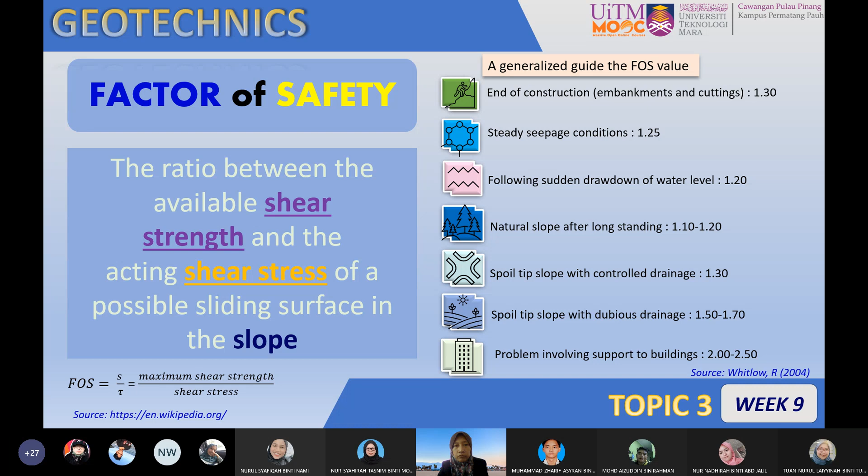Because of the additional loads that you apply on the foundation itself. If the foundation lies on the hilly sides, the value of FOS must be taken larger compared to other applications.

This gives us the formula: FOS equals maximum shear strength over shear stress, or by another definition, FOS is considered as restoring moment over disturbing moment. Later I will show you the differences between the restoring moment and the disturbing moment.

Now, this information tells you that when dealing with short-term stability, you have to choose the right strength parameters in your analysis. For example, when we analyze shear strength for undrained conditions, this can be considered short-term stability, and the parameters of the soil at this stage use the undrained C.

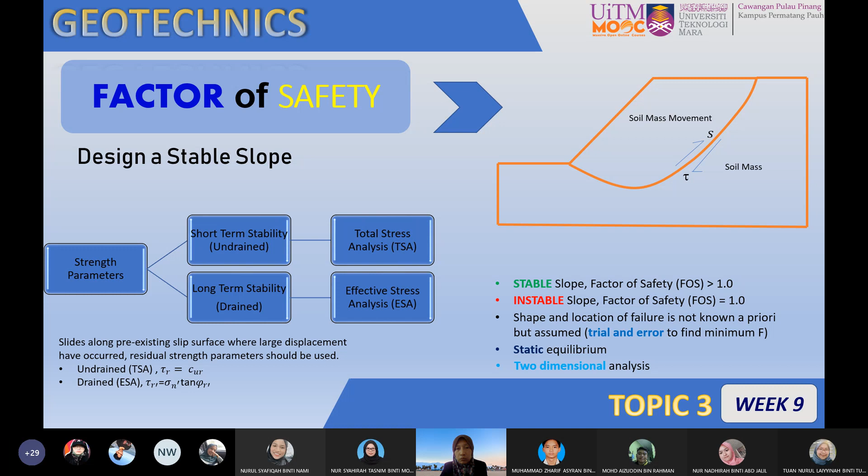As I said, for complex problems involving different soil parameters, pore water pressure effects, the water table, and additional loading applied to the slope, we couldn't analyze it using the limit equilibrium method at that time. Somehow it can be done, but it requires advanced computer technology to analyze the problem.

So these are the examples of the failure for slope. We have the planar failures, we have the circular failures, we have wedge failures, and the last one is the complex failures. For planar failures, it can be categorized into two: infinite slopes and also the finite slopes. So for infinite slopes, we have small depth, long failure surface. Meanwhile, for finite slope, we have a simple wedge. This one just refreshes what we have learned in the previous class.

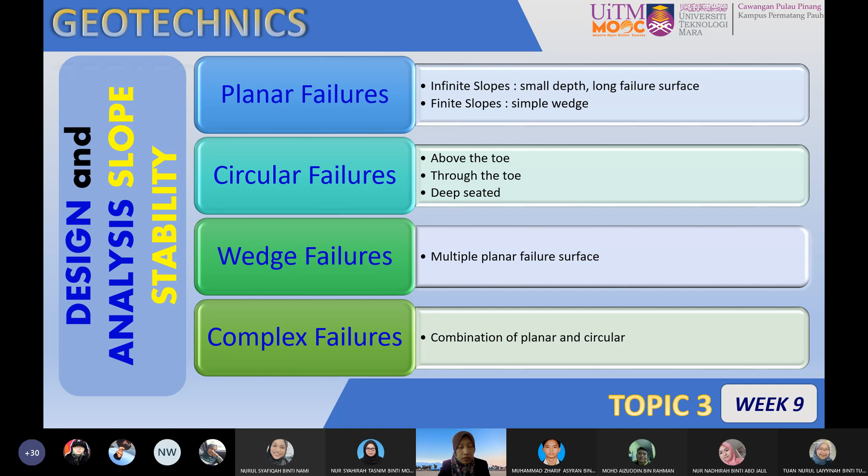Same goes to the circular failures. We have 3 types of circular failures. We have base failure, we have toe failure, we have also face failures. And the next one is the wedge failures. This involves multiple planar failure surfaces. And the next one is the complex failures, a combination of planar and circular.

And we go next to the type of stability analysis. For this time, we can see that the slope stability analysis can be done using 2 different procedures or 2 different methods. First, we can adopt the mass procedure method, and then the second one we can adopt the method of slices. What are the differences between these 2 methods or procedures?

The mass procedure is when the mass of the soil above the surface of sliding is taken as a unit. This procedure is useful when the soil that forms the slope is assumed to be homogeneous, although this is not the case in most natural slopes.

In comparison, in the method of slices, the soil above the surface of sliding is divided into a number of vertical parallel slices. So the stability of each slice is calculated separately. This is a versatile technique in which non-homogeneity of the soil and pore water pressure can be taken into consideration. It also accounts for the variations of the normal stress along the potential failure surface.

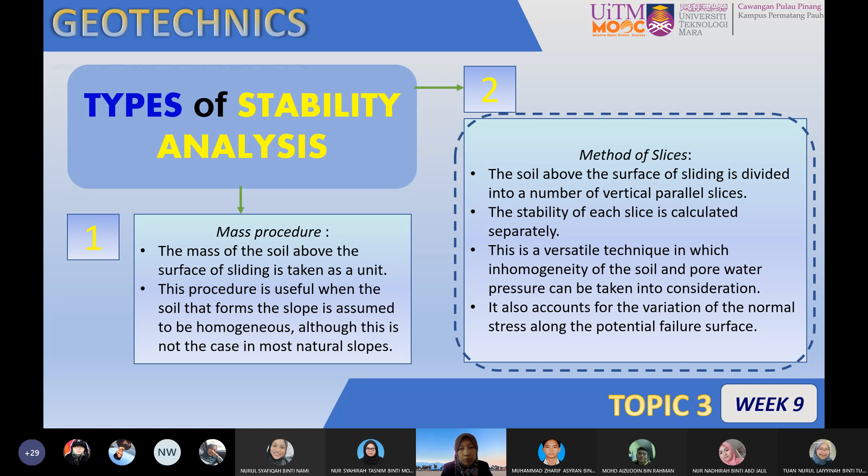So for your level, in this class, we only concentrate on the method of slices. Actually, you can analyze a slope using the mass procedure, but it depends on the situation. If you have a simple homogeneous soil profile, the best one is the mass procedure because we don't need to divide into vertical slices. Meanwhile, if you have a heterogeneous soil profile involving a lot of soil parameters, the method of slices is the best option to be taken in your analysis.

Okay, next we move to the stability analysis using total stress analysis by method of slices. These are the features categorized under total stress analysis. It is also known as short-term stability, that is end of construction, during and immediately after a newly cut or constructed slope in a fully saturated clay, with little drainage to occur. Undrained shear strength parameters need to be used, where Phi-u is 0 for fully saturated clay, and you have the undrained c and also the undrained Phi.

So how do we know whether to use TSA or ESA? Look at the problem statement. If the problem statement says that you have to find the FOS immediately after the embankment is constructed, that means you need to use the undrained strength parameters. If the problem statement says calculate or check the stability of the embankment slope 10 years after construction has been done, it means that it is a long-term stability analysis problem.

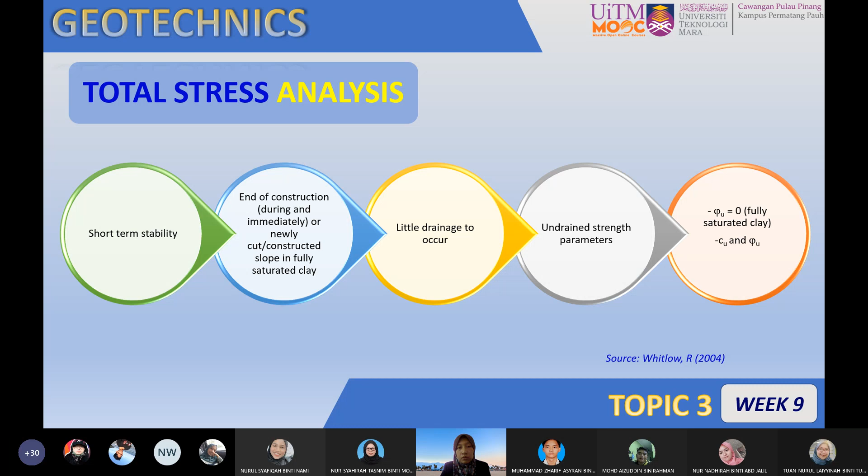So the next thing is the conditions where we can adopt all those analyses, such as homogeneous slope, heterogeneous slope, tension crack, and the next one is the submerged slope. So what is a homogeneous slope? Simply put, it is when the physical properties of the soil are similar. Let's say we have a single layer of soil, so we can consider it a homogeneous slope.

If you have multiple layers of soil on the slope, say soil type A and soil type B, then the slope is categorized as heterogeneous.

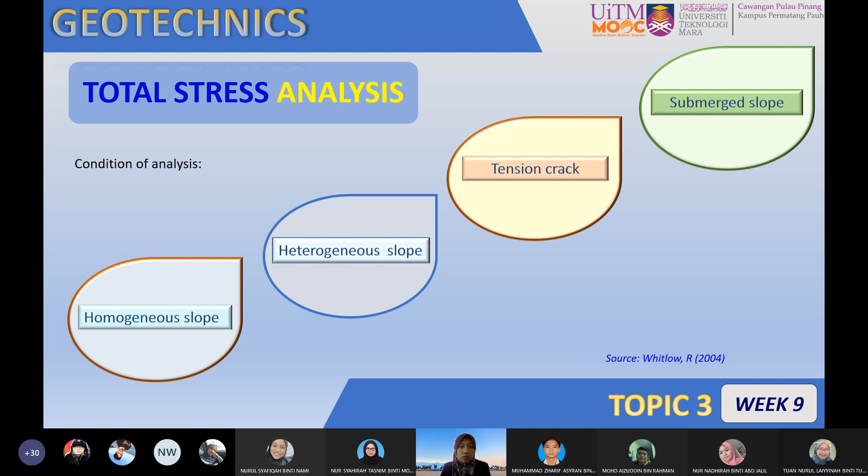Somehow, when you have a slope made of material from fully saturated clay, the slope is prone to have tension cracks, and it also has to be considered when you get the submerged slope problem. So the analysis will be different according to these four conditions.

Okay, look at this total stress analysis. The total stress analysis is actually applied to the case of a newly cut or newly constructed slope in a fully saturated clay, and the undrained shear strength, the shear stress, is equal to undrained Cu. It is assumed that the failure surface will take the cross-sectional form of a circular arc, usually referred to as the slip circle. The center of the critical slip circle will be somewhere above the top of the slope.

So the critical failure slip circle is one of an infinite number of potential circles. That means you have to do a few trial and errors to find the most critical one. If you look at the left figure here, you can see there are many potential slip circles created at this slope, because we are searching for the most critical, the minimum FOS.

So in slope stability, what we are actually doing is that we need to design for the most critical one. If the most critical one is safe, then whatever slope geometry comes to you will also be considered safe, stable. So at this moment, you have to find where the center of the slip circle is that produces the minimum FOS.

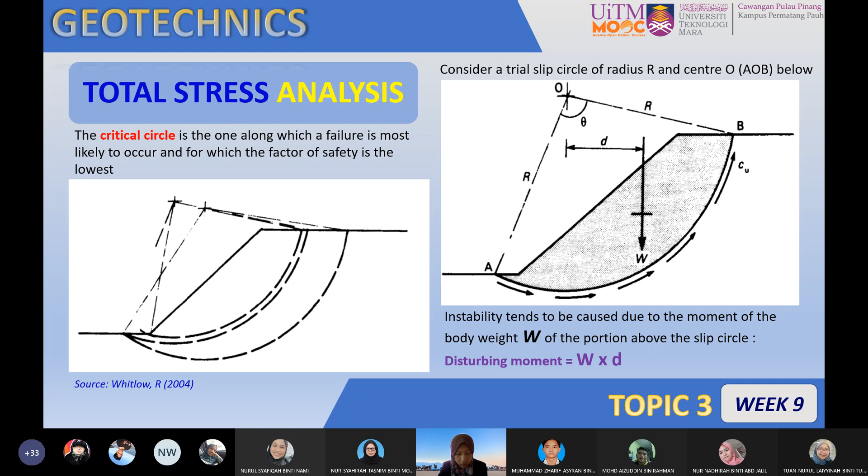So the length from A to B is equal to r theta. So the shear resistance force along AB is Cu r theta. Therefore, the shear resistance moment is equal to Cu r squared theta. So the shear resistance moment is Cu r squared theta, and the disturbing moment is Wd. Therefore, the FOS is calculated as you see here, Cu r squared theta over Wd.

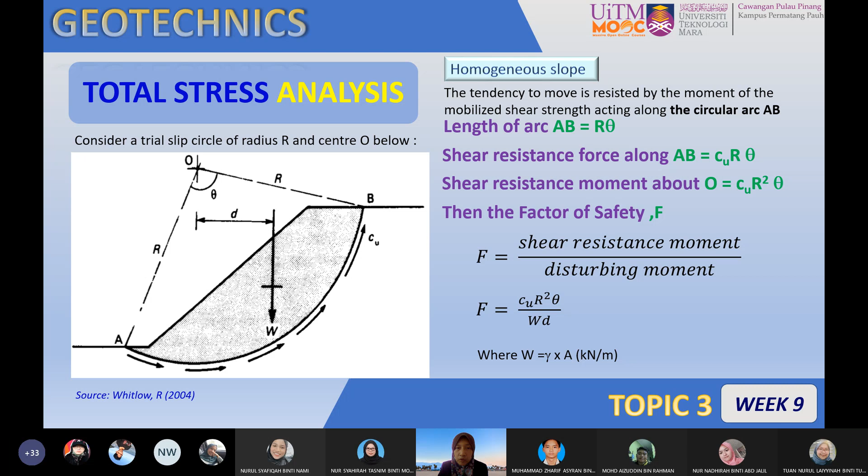So Wd is the disturbing moment. Meanwhile, this part here is the shear resistance moment. So what is W? W is the weight of soil above the slip circle. So it is the area times the unit weight of the soil.

So by this explanation, I hope that you can imagine how one slope, or one weight of soil, tends to move in this direction. At the same time, the other forces, what we call the restoring force from Cu and r theta, try to resist the moment coming from the weight of soil.

And the next one shows the conditions where we try to analyze total stress analysis for different conditions, such as an embankment or tip, figure A, then a cutting in a stratified deposit, B, and the next one is the effect of an underlying hard layer. What it shows is the extended formula when we consider all the cases here, and in situations A, B, C, and D, the created slip circle will be different according to the conditions.

For example, for A, the effect of an underlying hard layer. What happens to the shape of the slip circle when we have an underlying hard layer? So for figure A, when we have the hard layer at the bottom and the upper layer is soft, it gives us two kinds of failure.

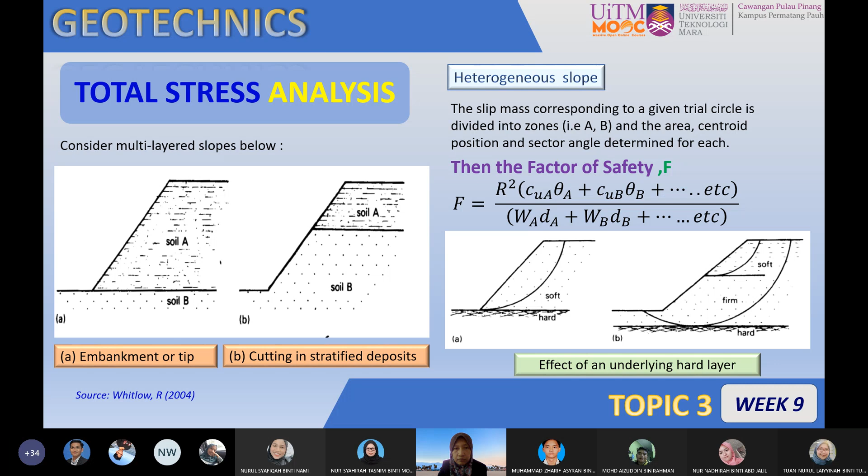And the next one, if we have a tension crack effect. So what about the calculation of the FOS? Of course, when we have the tension crack effect, the arc length above here will be taken as 0 because there is no shear strength at this portion. So the resistant shear force coming from the mobilized shear strength is reduced, because the theta, the slip circle angle, is also reduced.

And it is stated that in cohesive soil, the tension crack tends to form near the top of the slope as the conditions of limiting equilibrium. So no shear strength can be developed in the tension crack, but it can be filled with water. Allowance must be made for the hydrostatic force Pw, which acts horizontally, adding to the disturbing moment. So this time you can see that Pw·Yc is another component in this formula in the disturbing moment.

So the FOS is equal to Cu R square θ over (Wd plus the hydrostatic force times the perpendicular distance Yc). The Yc is taken from 2/3 of Z0 plus the height from the top of the slope to O. That's how we calculate Yc.

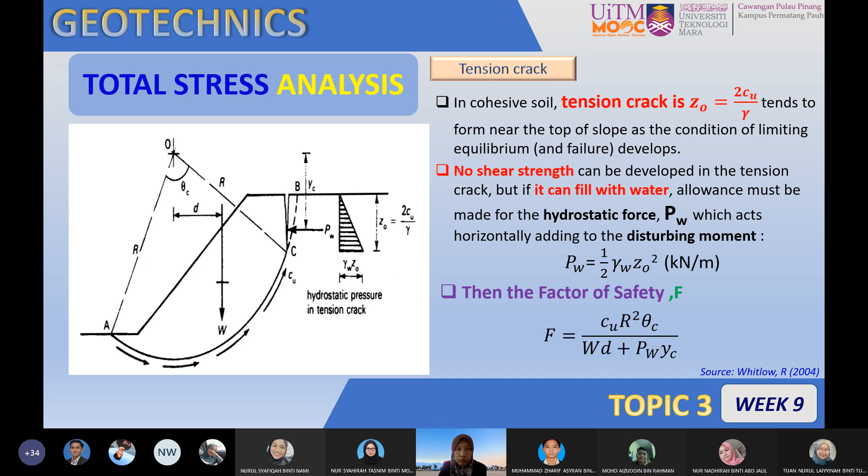And you can see that here, with the effect of the tension crack, theta is reduced to theta C, and the length of the arc above here at the tension crack depth is taken as 0. That's why you can expect that the value of FOS is supposedly getting lower. If you have this one bigger, the FOS is supposedly lower.

And then the next case, when we have a submerged slope. For the submerged slope, if you look at this figure, the equilibrium of the moment of the force is considered as 0. The left side is equal to the right side. The left and right sides' equilibrium conditions of the moment are taken in this case for a submerged slope.

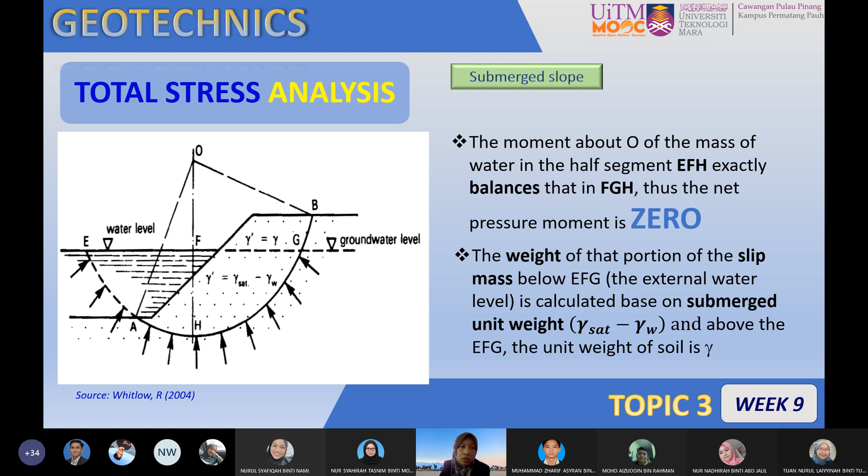So you can see from here that the moment about O of the mass of water in the half segment EFH on the left side is equal to the moment on the right side FGH. Thus the net pressure moment is considered as 0. For the weight of the soil mass above the water level, the unit weight of the soil will be taken as the bulk unit weight. Meanwhile, for soil below the water level, we have to consider the submerged unit weight, gamma soil minus gamma water.

This is one example of a case where you have a homogeneous slope and also the effect of a tension crack. We need to calculate the FOS first without the effect of the tension crack, then calculate the FOS with the tension crack empty of water, and next calculate the FOS with the tension crack full of water.

So as you see from this example, W is taken as one single unit. Looking at these solutions, we know that the mass procedure is used to get the FOS value. Because of what? You can see that the W above the slip circle is not divided into parallel vertical slices. Thus W is considered as one single unit mass. So this example uses the mass procedure to analyze the FOS.

Okay, first of all, when you have this kind of problem, we need to find the radius. Why is the radius important? Because you saw just now in the formula we have Cu R square θ over Wd. So R, the radius of the slip circle, can be found from the Pythagoras theorem, and then the sector angle, where the sector angle is measured. So you can see from here there are two sector angles.

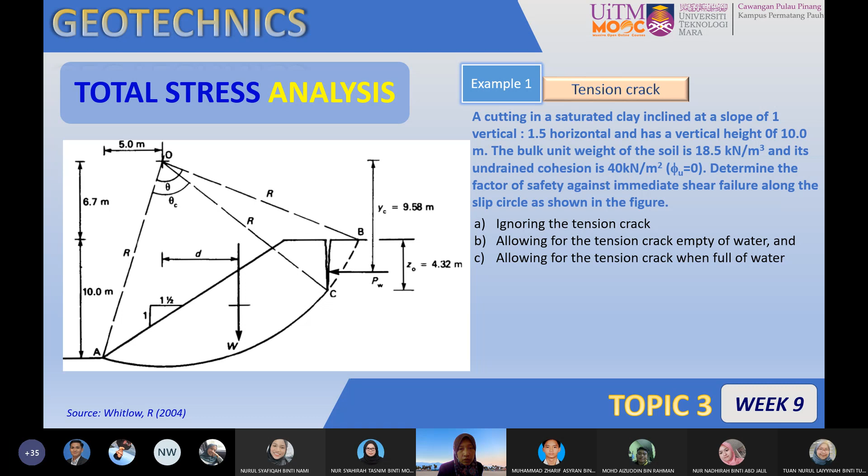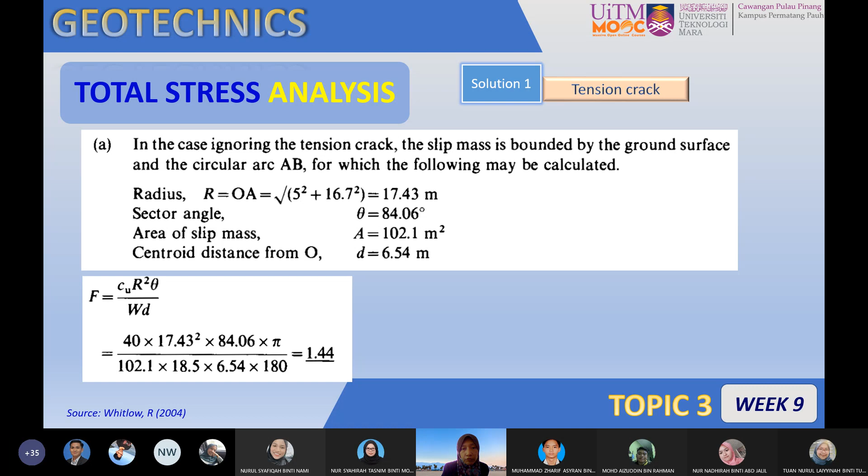It's very important to check closely the parameters involved, the right value to be considered in the calculations. And when you have all those parameters, you substitute into this formula. So first of all, we have the FOS is 1.44. Automatically, we can say that the slope is stable by checking the FOS is 1.44. The FOS is unitless. Please make sure when you write down the answer, there's no unit next to the figure number.

And the next one, you need to calculate the effect of tension crack empty of water. So as I explained just now, the sector angle reduced to 67.44, and same goes to the area of the soil mass, which is reduced, and the centroid distance from O is also reduced. Thus, the calculated FOS, as you see here, is around 1.84.

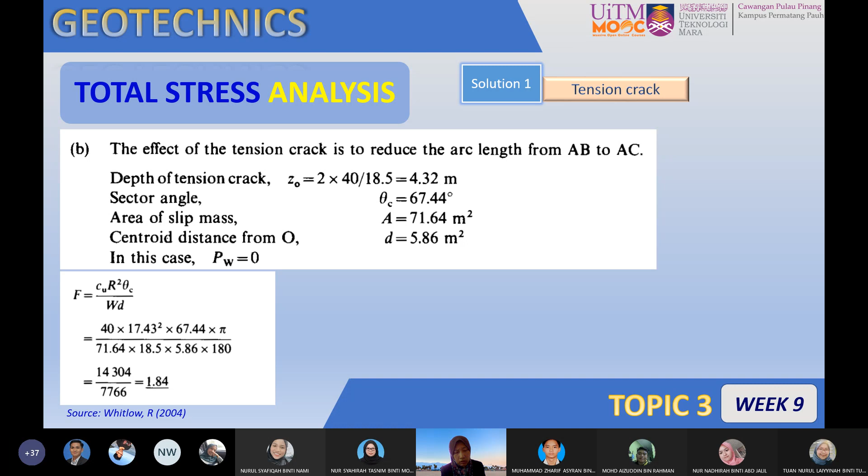And the next case is where we have a tension crack full of water. At this time, you need to calculate the hydrostatic force PW. The PW is taken from the formula: a half times gamma water times Z naught to the power of 2. So the calculated hydrostatic thrust is equal to 91.54. Then you need to find out what is the YC, and we get YC is 9.58.

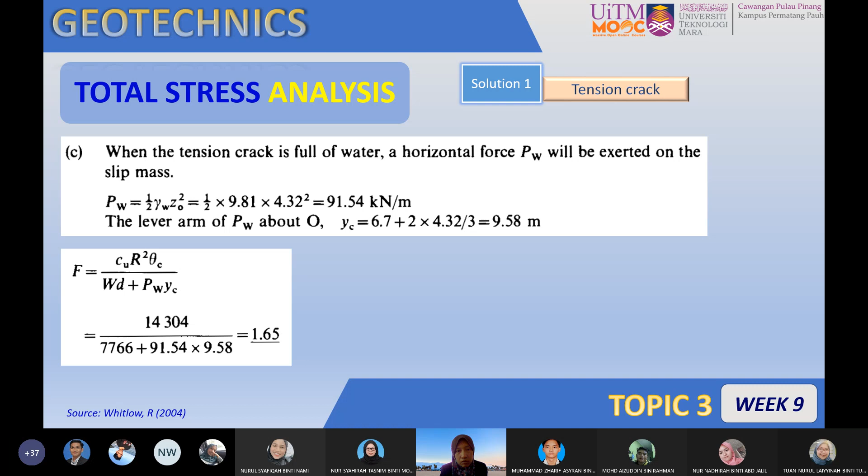Substitute into this formula, you can see that the FOS is 1.65. So the FOS from the second case to the third case shows a lesser value. From 1.8 something just now, it reduced to 1.65, because right now we have the hydrostatic force added as a disturbing moment.

How about if you need to analyze the problem using the method of slices? Same goes to the process. As you can see here, the single weight W of the mass is now divided into vertical slices. Just now we only had a single W1. But when we divide all the soil mass above the slip circle into a few vertical slices, the single W becomes W1, W2, W3, W4, W5 and W6.

It is recommended that you divide the W into equal widths. For example, from here to here is 2 meters, and then the width for the next vertical slice is the same, 2 meters. Same goes to the final one here. The formula is still the same. The only difference is that you need to tabulate a table to find the final answer for the shear resistance moment and also the disturbing moment.

Right now D is not considered as a single D. D needs to be taken differently for each vertical slice. For example, if you have W for slice number 1, the centroid for W1 is acting at 1/3 from the base. So you have to measure W of slice 1 to O. So what is the distance? And then same goes to W2.

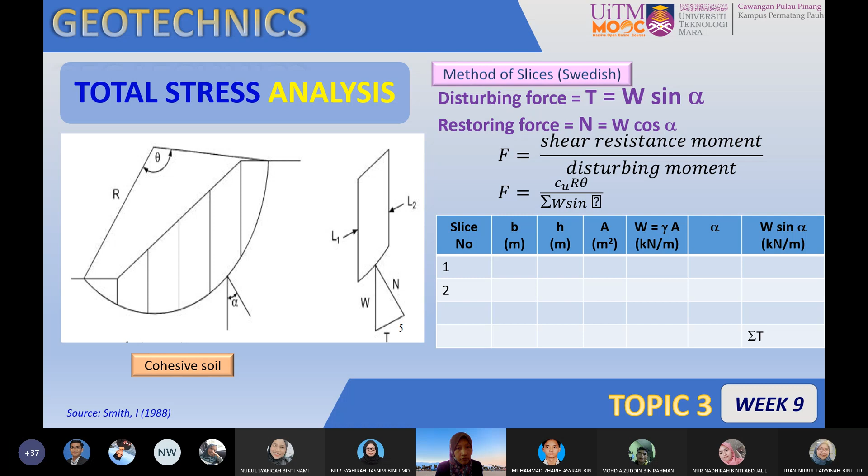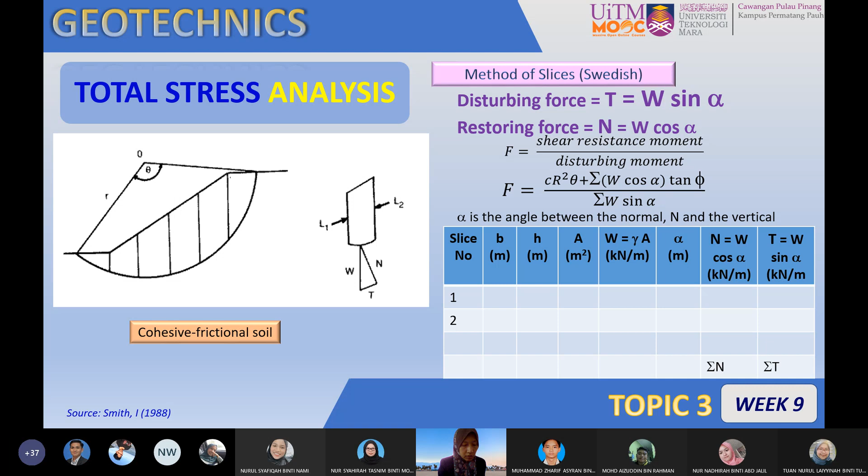So when we resolve into T and N, this is the formula we have. N is W cos alpha, meanwhile T is W sin alpha. So substitute this formula into these equations. Now we have the shear resisting moment over the disturbing moment becoming cu r theta over W sin alpha. So this is when you adopt the Swedish method, for example, for cohesive soil. Okay, same goes here for cohesive frictional soil. So again, tabulate the table, get the summation of T and the summation of N.

Okay, now we extend the analysis to the long-term problem analysis using the method of slices. These features tell you the situation when we can apply the effective stress analysis. First of all, effective stress analysis is also considered as long-term stability. This is used for existing slopes and embankments, spoil and waste tips, earth dams with steady or intermittent seepage, where we allow drainage to occur, and you can measure the effect of pore water pressure.

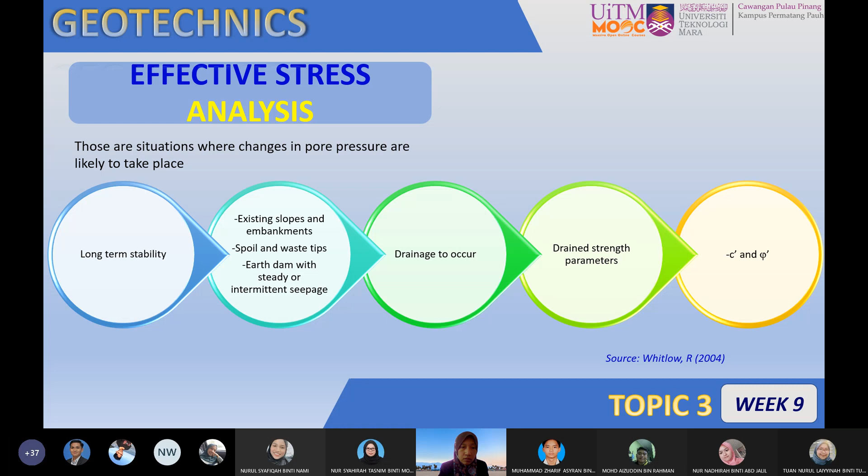At this time, we use the drained strength parameters, and you can see that the effective c and the effective phi are taken in the calculations. So it's actually vice versa to the total stress analysis. In effective stress analysis, there are two theories involved behind the calculations. The first is Fellenius, and the next one is Bishop. So what are the differences between these two theories?

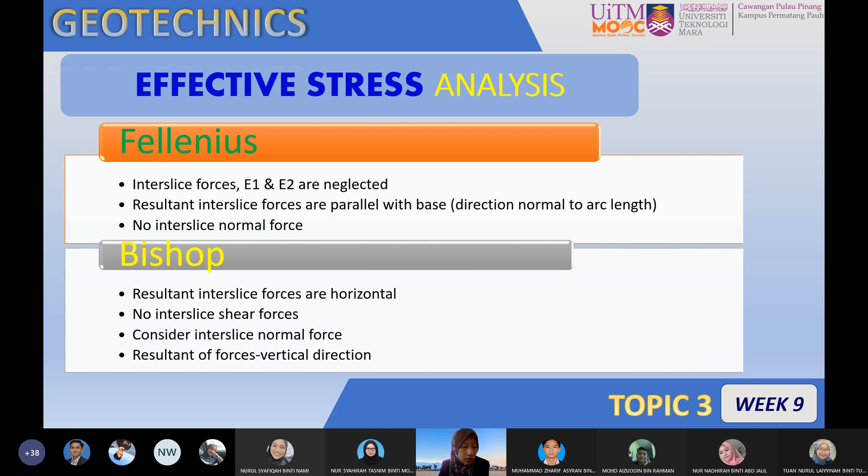For example, Fellenius assumes that the interslice forces E1 and E2 are neglected, the resultant interslice forces are parallel with the base direction normal to the arc length, and there is no interslice normal force. For Bishop, the resultant interslice forces are horizontal, and there are no interslice shear forces. It considers the interslice normal force, the resultant of forces in the vertical direction. So there is more complexity in the Bishop theory, as you will see after this.

Okay, this is the derivation of Fellenius using the method of slices. When we take Fellenius into consideration, now you can see the effect of the pore water pressure U. So above here, you can see that the pore water pressure is 0. For example, UL is equal to 0. So what is L?

L is a B sec alpha, which is the missing point here. The deriving of this formula is taken from here. You take one interslice, one intervertical slice from this soil weight W.

So you can see that all those interslice force components are derived from here. We have the internal vertical interslice force X1 and also X2. X1 is in equilibrium, however the direction is opposite between X1 and X2. Same for E1 and E2. But in this case, for Fellenius, E1 and E2 are considered zero because the method ignores their effect.

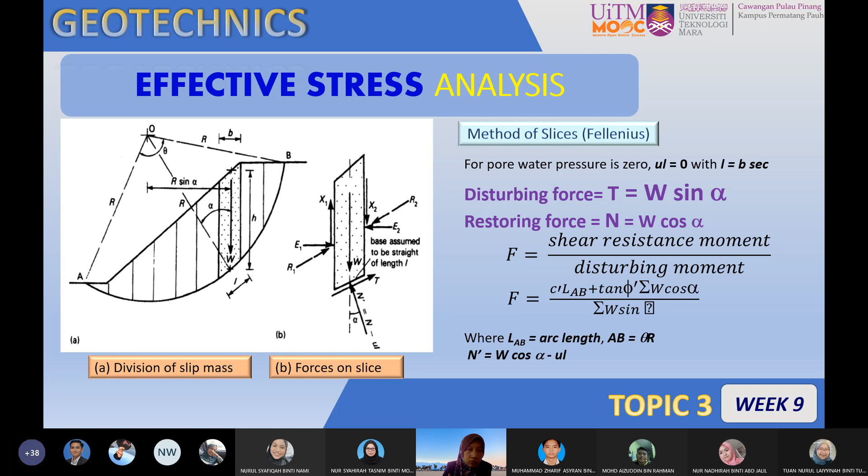Okay, the next one: we see that without tension crack effect, somehow we have to consider the analysis if we have a tension crack effect. This mostly occurs in cohesive material soils. At this part, the considerations for calculating z nought for effective stress analysis are totally different.

Right now you can see that the z nought formula takes the active lateral earth pressure Ka in the equation. Ka is 1 minus sin phi over 1 plus sin phi. You substitute this into the z nought formula so you can get the tension crack. The formulas are still the same.

We have the disturbing force, and we also have the restoring force. You convert all these things by taking the moment at O. This forms the shear resistance moment over the disturbing moment, giving the formula: C effective times L AB, plus tangent effective phi, times summation W cos alpha, over summation W sin alpha.

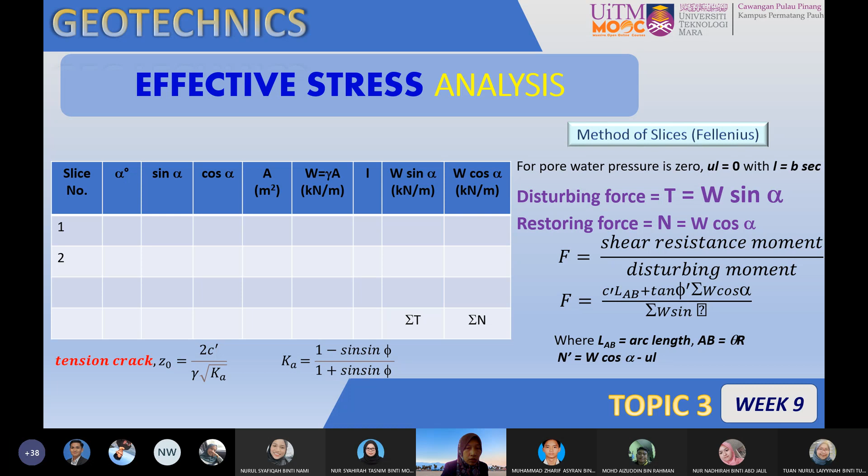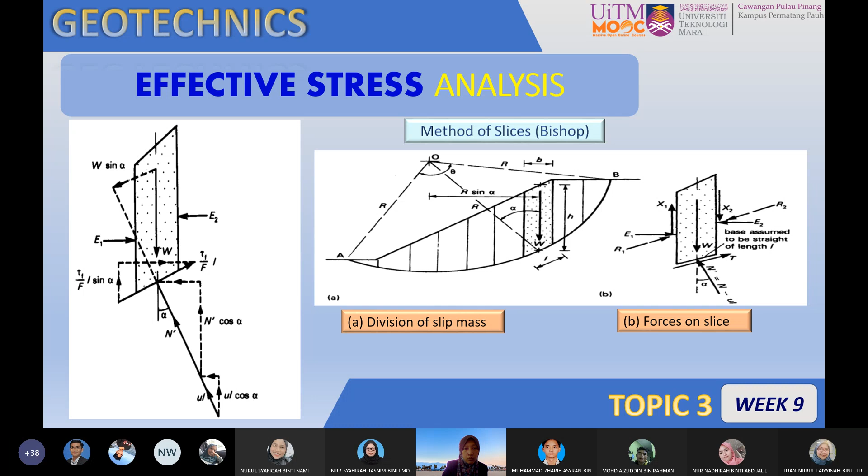Okay, the FOS using the method of slices for Bishop's theory. It is assumed that the forces acting on the sides of any slice have zero resultant in the vertical direction - so now zero resultant in vertical direction. For equilibrium along the base of the slice, these are the components involved, assuming it equals zero.

So we have W sin alpha minus shear stress at failure over F times L. So W sin alpha minus effective C L plus effective N tangent phi, over F. We are looking for F because we want to find the factor of safety. Rearranging the formula, this is the final FOS that we have.

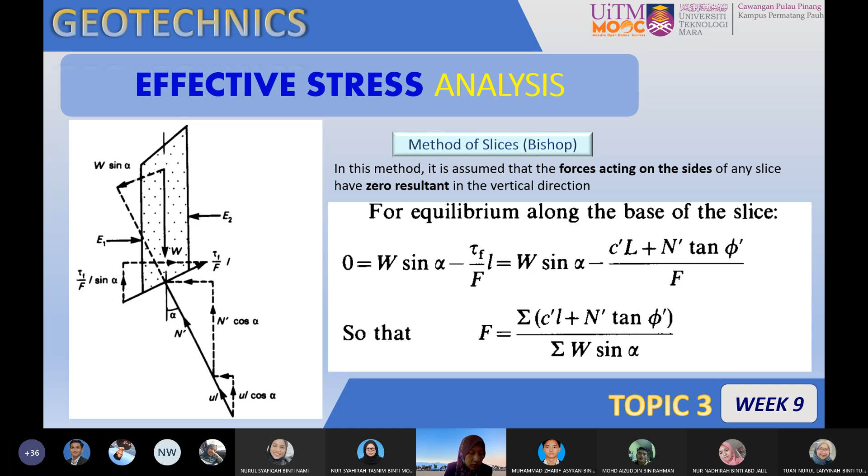Let's say you are calculating the equilibrium in the vertical direction. So the formula is extended into the more complex one, as you can see at the bottom part here.

I won't show you how to derive it, but you can take your own time to check how to start off if you're taking equilibrium in vertical directions. So assuming total equals 0, you derive from W minus N effective cos alpha minus UL cos alpha minus tau F over FL sin alpha.

For effective stress analysis, you might have the value for water pressure. Sometimes we assume water pressure is 0. But if you have the effect of pore water pressure and groundwater level, you have to consider U in the FOS formula, so it cannot be neglected. The derivation can be adapted directly from this formula.

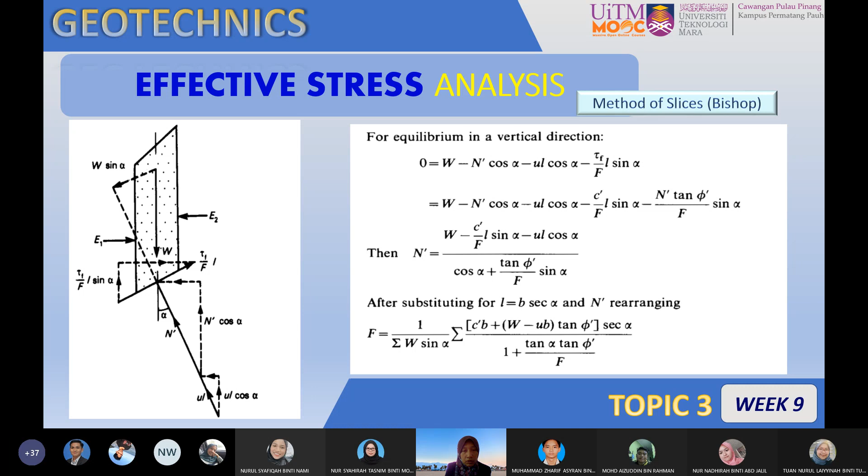One thing to remind everyone: for this you have to get graph paper, and please have a set of geometry tools and a protractor to assist you in analyzing slope stability manually, because for this assessment we evaluate you on answering the question through your own calculations.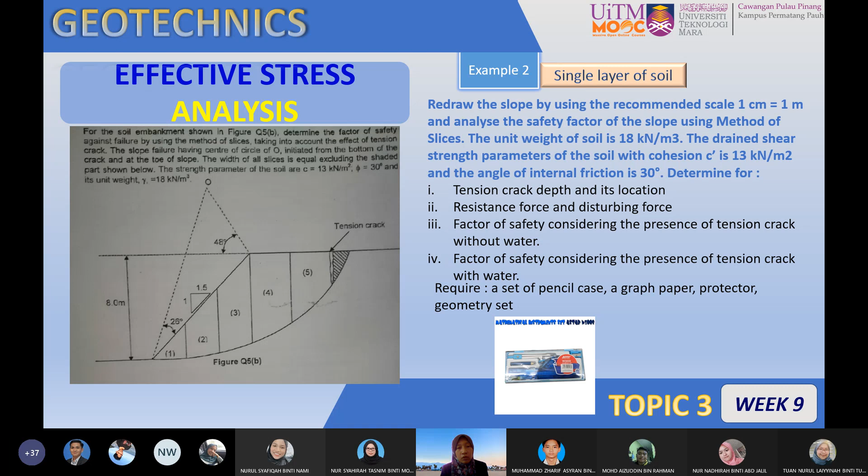Remember in assignment 1 we will cover topic 1 and topic 3. Topic 1 is totally theoretical, and topic 3 consists of theory and calculations, so don't take it for granted. When you go through the notes, please also move your hand to draw the slope problem and calculate the factor of safety. So first, how are we going to solve this problem?

Let's take a glance through, because later I'll show you how to construct it. First you have to understand what information is involved and what kind of data input is needed to tabulate the table. For example, we have slice number, the width of each slice, H1, H2, the area of the slice, the unit weight, the weight W of the slice, alpha, the T component, normal force, shear force as T, and normal as N.

Because the first question asks you to calculate the tension depth and locate the position of the tension crack, you have to calculate Ka, and then find z nought. Ka is straightforward, you just get phi and calculate Ka. Same goes for z nought, for example 2.5.

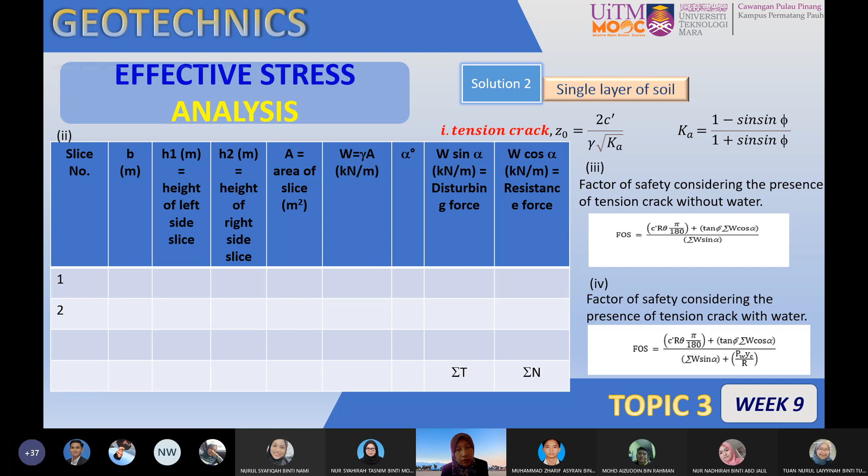The next step is to calculate the factor of safety without the effect of water, and then with water. So how do we analyze it? These are the informations required, and some simple instructions for you to follow. We begin by determining the angle of 26, and then from the horizontal uphill of the slope we open up the angle as 48.

Once we have the intersection between 26 and 48, we can set the point of the slip circle O. Then we need to measure the radius of the slip circle. For example, if the radius of the slip circle is 10, make sure the intersection at A is the same 10 from O to this point.

So you can draw the slip circle at the intersection of point O. Next, divide the soil mass above the slip circle into equal vertical slices. Our scale drawing is taken as 1 centimeter equal to 1 meter, so when you draw the slope geometry, the height of slope of 8 meters is equal to 8 centimeters on the graph paper.

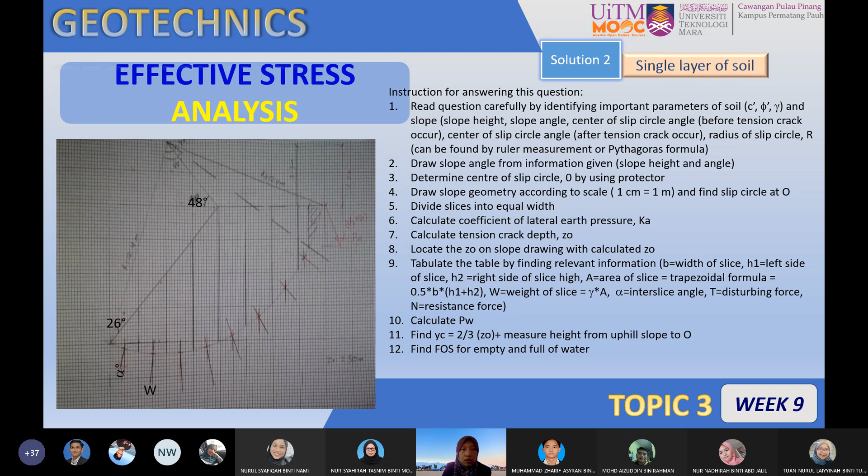After dividing the vertical slices into equal width, we need to determine the locations of W and X, and the interslice angle between W and N. The opening angle between W and N is the interslice angle. Since we have the tension crack effect, theta will be reduced to theta C. Next is how to calculate it.

After dividing into equal vertical slices, we need to find W for each slice: W1, W2, until the last W. The last slice affected by the tension crack will have its B reduced, so it gets smaller. The theta C, the length of the arc at this position, is considered as zero strength. That's why theta is reduced to theta C due to the tension crack.

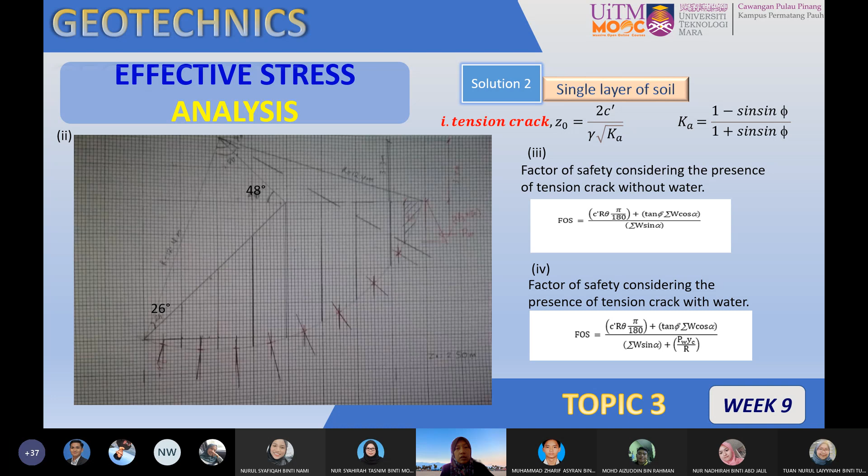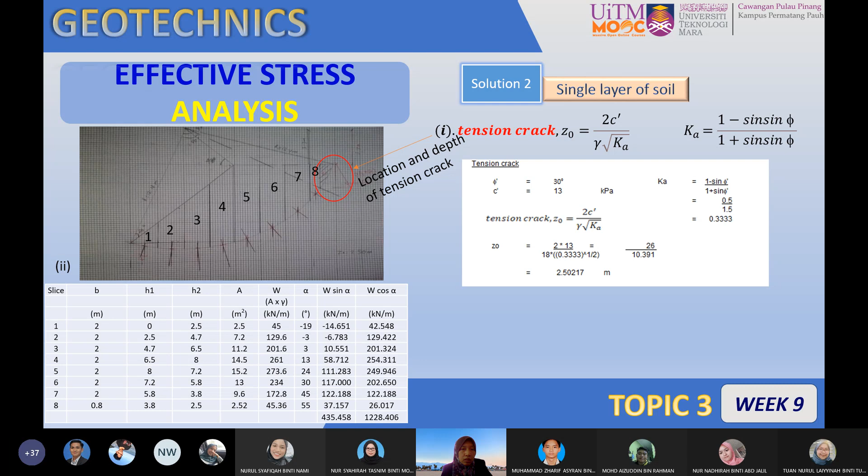Formulate the FOS according to this formula, and you get the answer FOS. This is the tabulated table for each parameter: the N component, the T component, the z nought, and the Ka tension depth. The next one is the FOS.

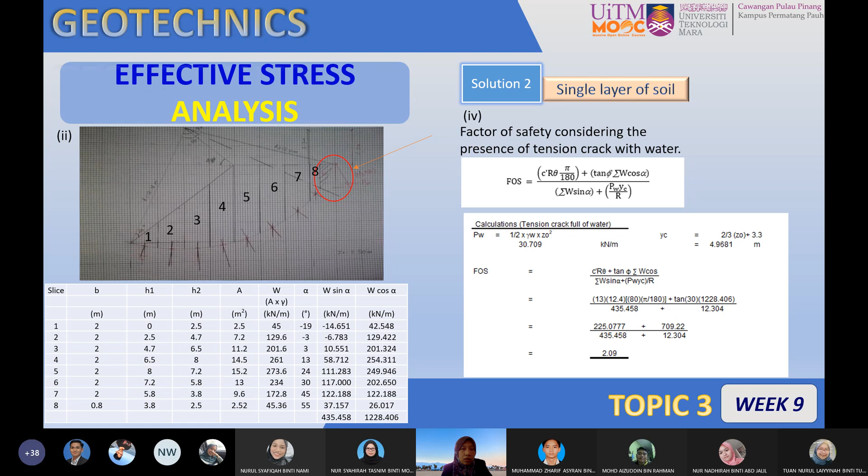The red circle here indicates the locations of the tension crack and depth. The final one is the FOS with full water, which is the position where the hydrostatic force becomes an additional component to the disturbing moment.

The next one, example 3, involves a stratified layer of soil. The problem shows different soil parameters for the upper layer, soil A, and for soil B. The sector angle of layer 1 and layer B will be different according to the slip circle.

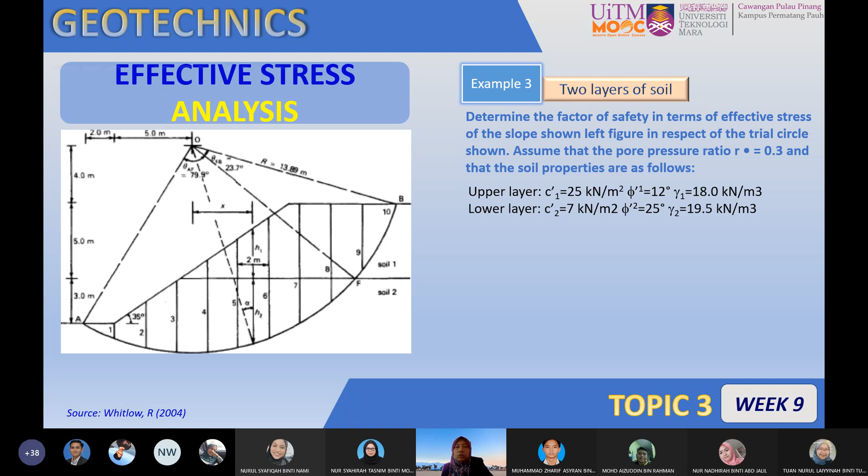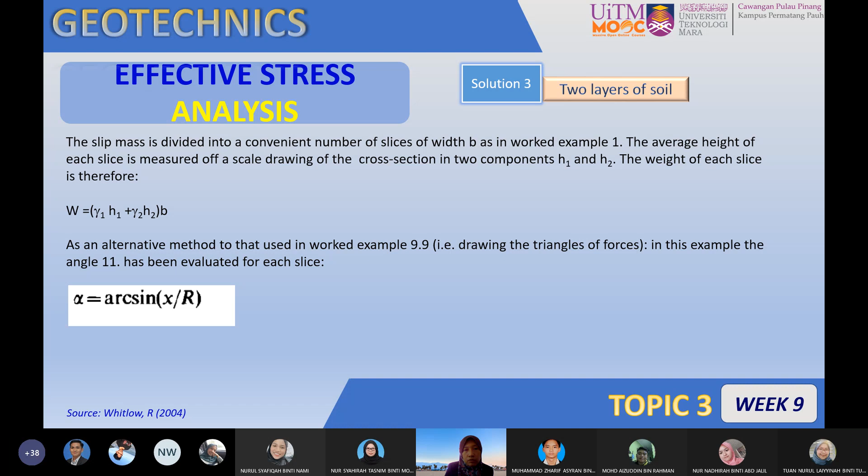If the slip circle only covers the upper layer, that is theta for layer 1, soil A. If the slip covers from here to here, that is the sector angle for the slip circle for layer 2. This will be considered when you tabulate into the table, so you have to be careful when you analyze it. The further solutions for example 3 can be seen from the handout.

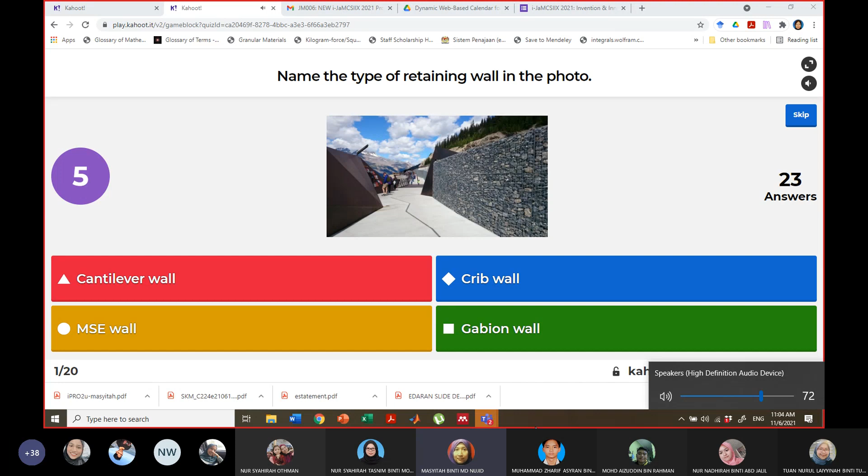Okay, 10 answers from you all. How many of you got the right answer with the remaining seconds left? It is Gabion walls, so 20. So you're still not familiar with the retaining wall type. The winner is Aizat. Good, next. So we have 20 questions.

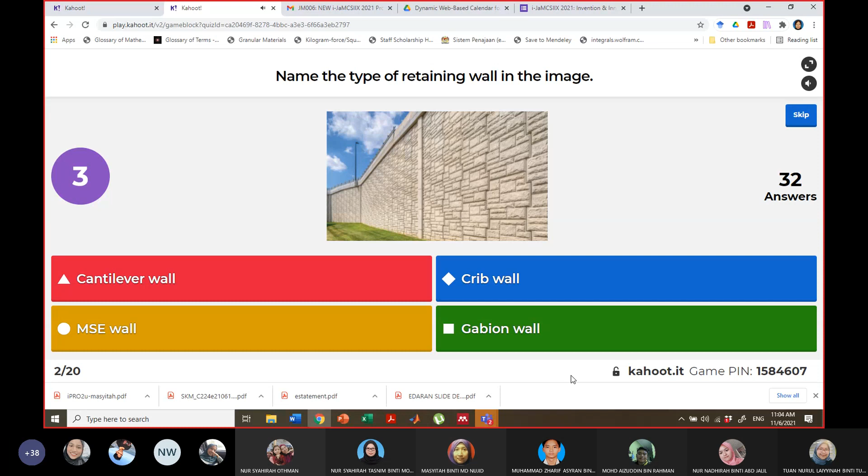What is this? Okay, MSE wall. MSE wall will be covered in the last chapter 4. Our winner is, okay, he keeps his position. The next question is, okay, same on the image.

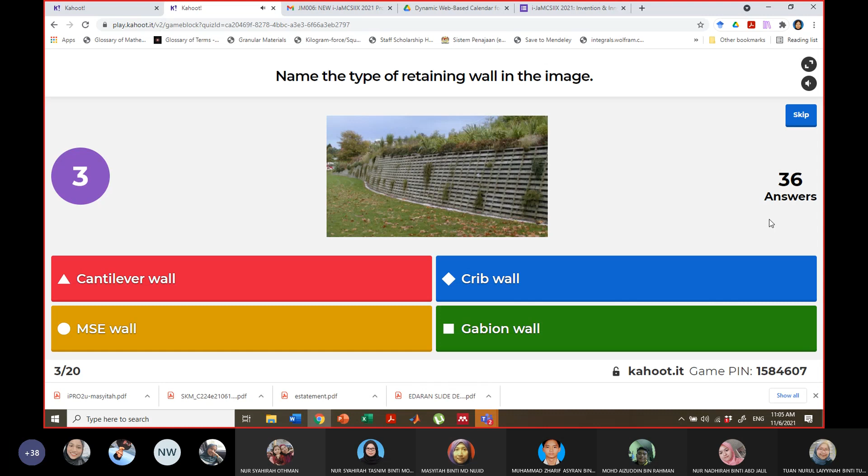Crib wall. Okay, 27. Good. Okay, so far so good. Tasnim is the highest climber. Oh, before this, okay, true or false? Rankine Ka is greater than Coulomb Ka. Is it true? Yes, the answer is true.

So Ka is the active lateral earth pressure. Okay, we have a new scorer, top scorer. Okay, Rankine Kp is greater than Coulomb. Is it true? Yeah, the answer is false. Okay, a bit balanced between 22 and 19. So who is our top scorer? So Erin, good effort and good try.

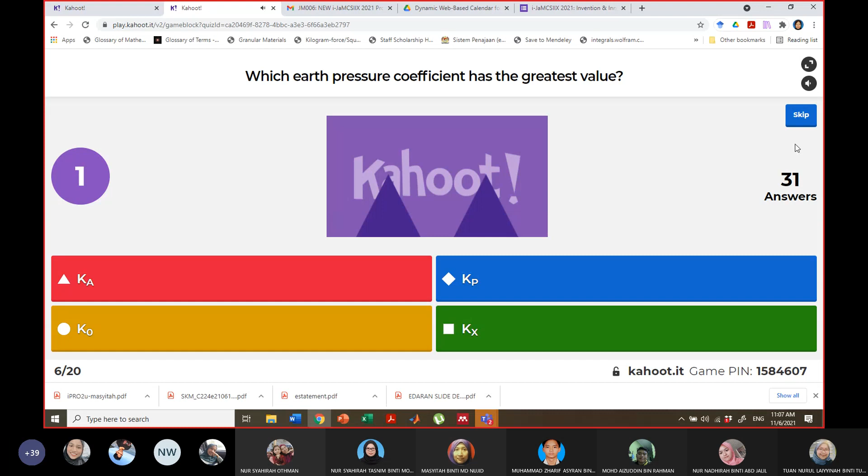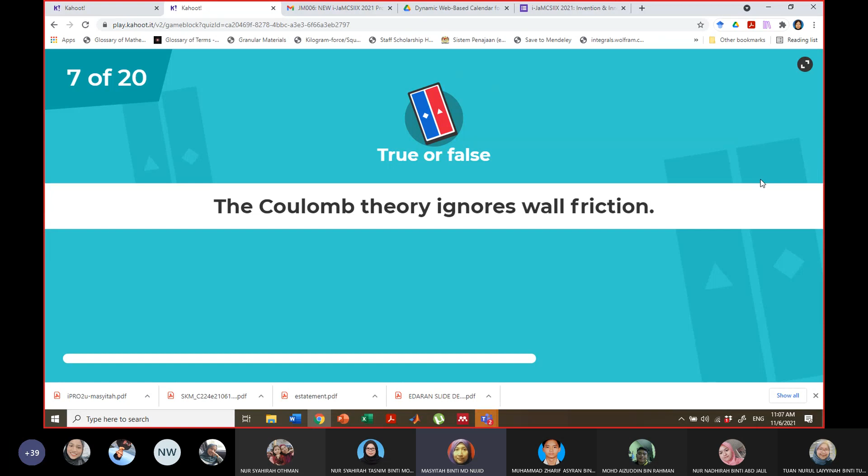So the next question is on the earth pressure coefficients. So actually we only have Ka, K0 and Kp. Among these three K, which one is the greatest value? Yeah, Kp. So, okay, she keeps her position. Okay, the answer is false. Next one. Okay, the other guys, please just participate to refresh your theoretical background.

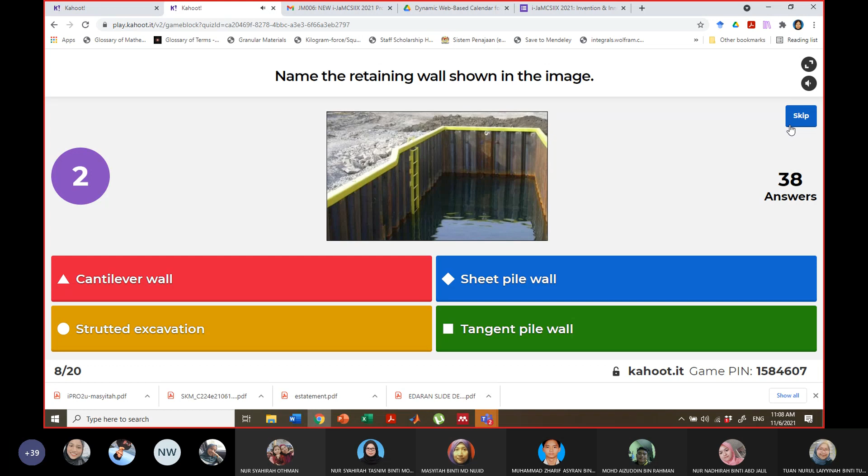Okay, what is this? Yes, sheet pile wall. Sheet pile wall, the best thing is that it can be in the water to retain water. Okay, so good, Erin. So the next question is the earth pressure distribution. Okay, quite difficult because only 9 answered. What's the answer? Okay, stiff clay. So it will be seen in the next topic. Start here. Okay, next one.

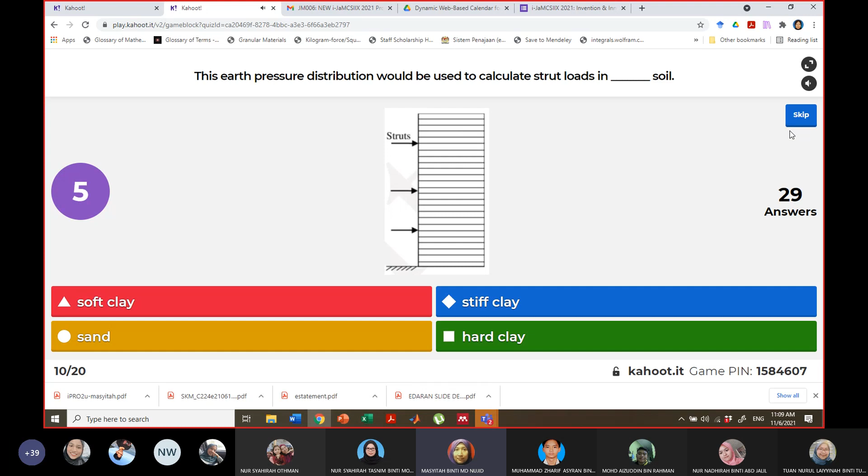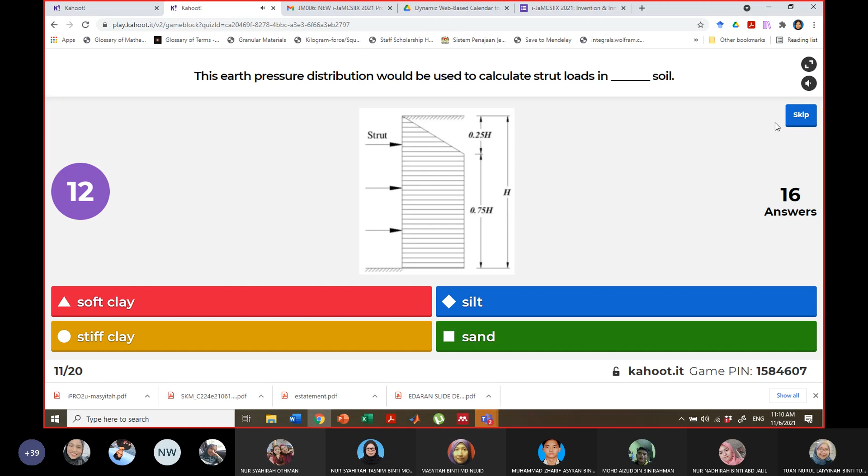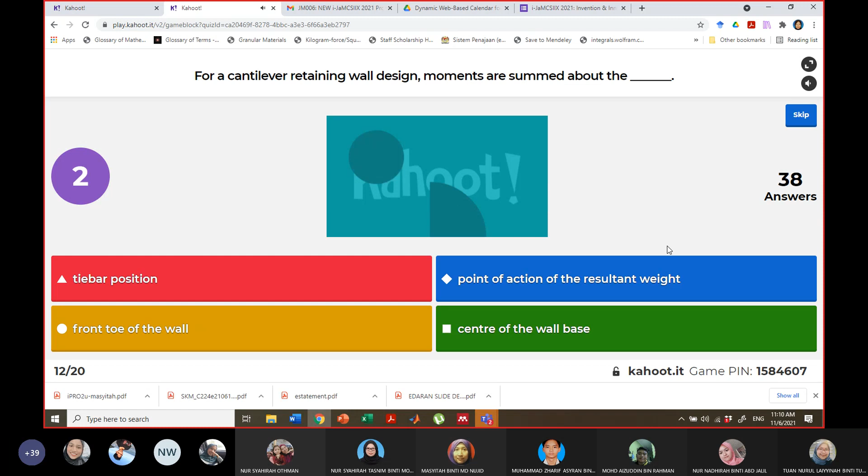Okay, the earth pressure distribution will be used to calculate strut loads in the figure here. Okay, the answer is sand. Okay, 5 players just dropped their answer. Next one. Okay, still the earth pressure. Okay, soft clay. Next, okay, there's a change in positions. So someone is climbing. Okay, for cantilever retaining wall design, moments are summed about the... Okay, the answer is the front toe of the wall. Okay, our winner is still Erin Yeager.

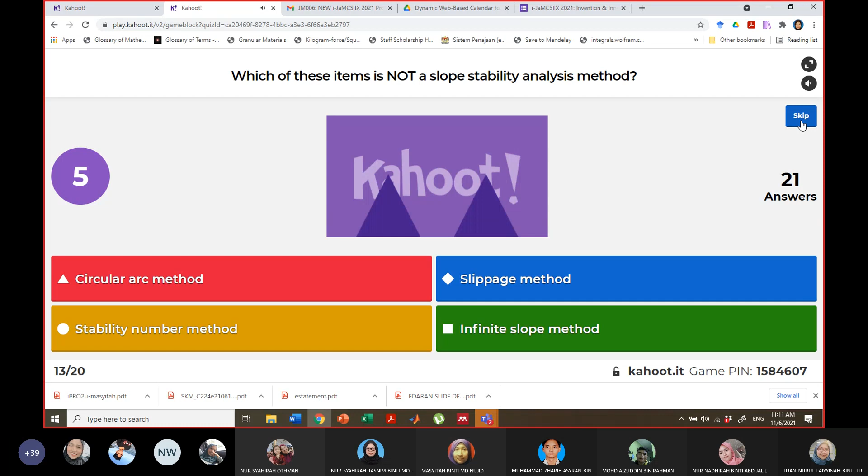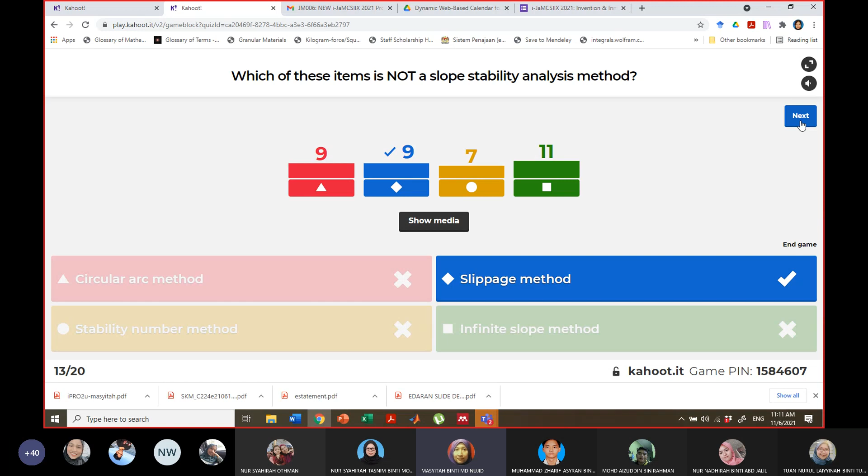So the next questions are on slope stability. This is our topic this morning. Okay, the answer is what? Yes, slippage methods. Because if you notice, I keep mentioning the circular arc method, and then the infinite slope method is also one of the slope failures, and stability number is another solution for how we can analyze the finite or infinite slope stability. However, this is not covered in our class. Okay, next question.

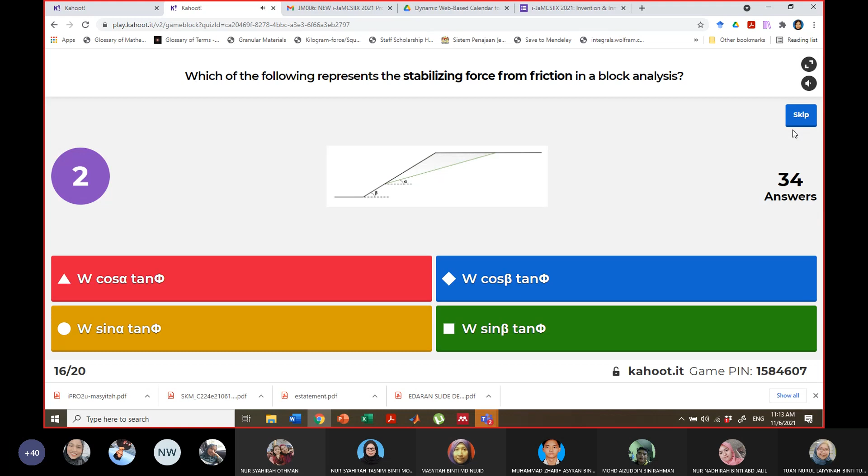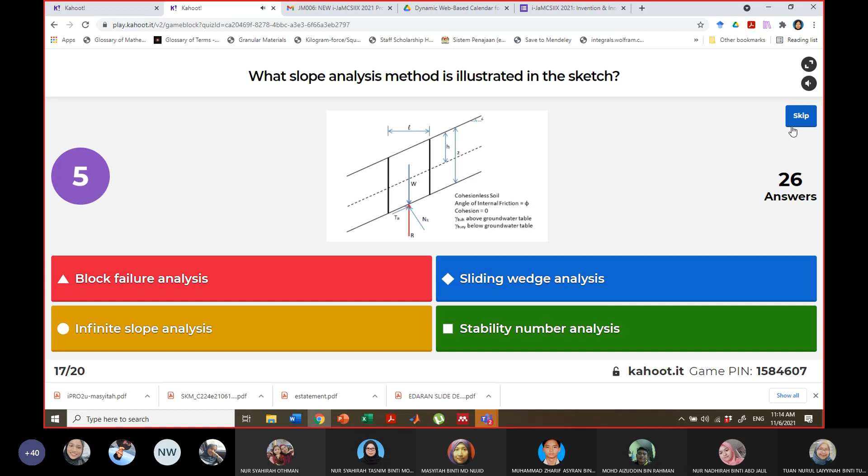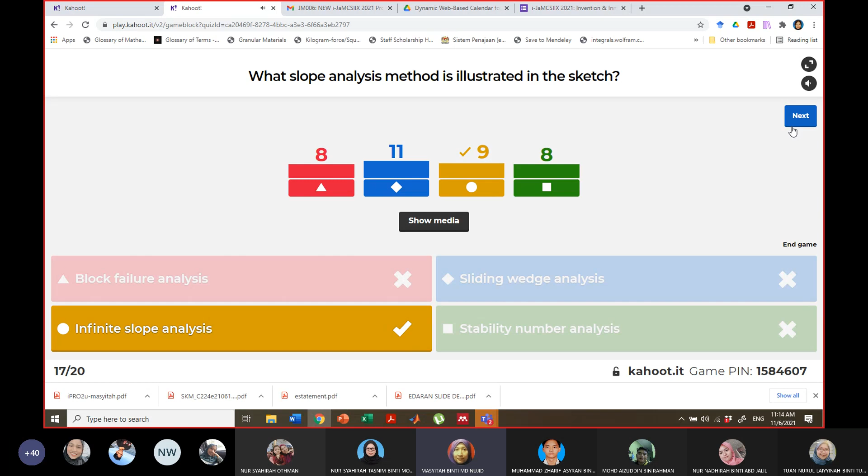Which of the following represents the stabilizing force from friction in block analysis? Okay, this is a postgraduate level question. However, you can try. Okay, the answer is W cos alpha tan phi. Okay, the position has changed to Erin. So, remaining 3 questions. What slope analysis method is illustrated here? Yes, infinite slope. Why infinite slope? Because you can see that the slope is long, limitless.

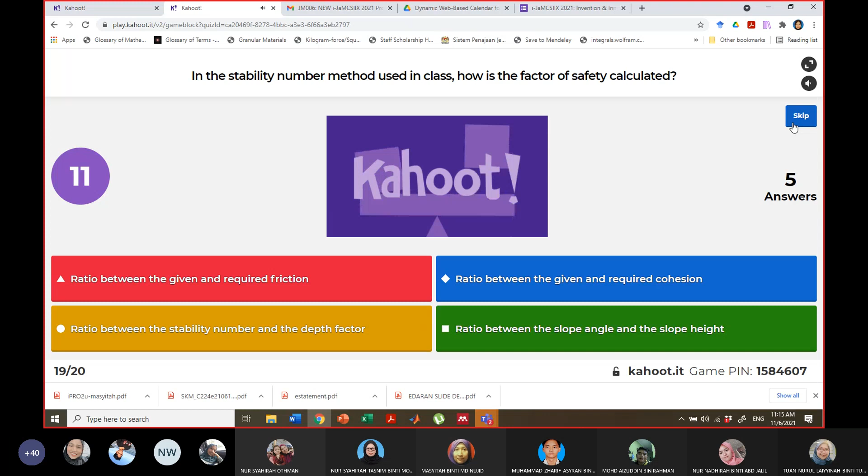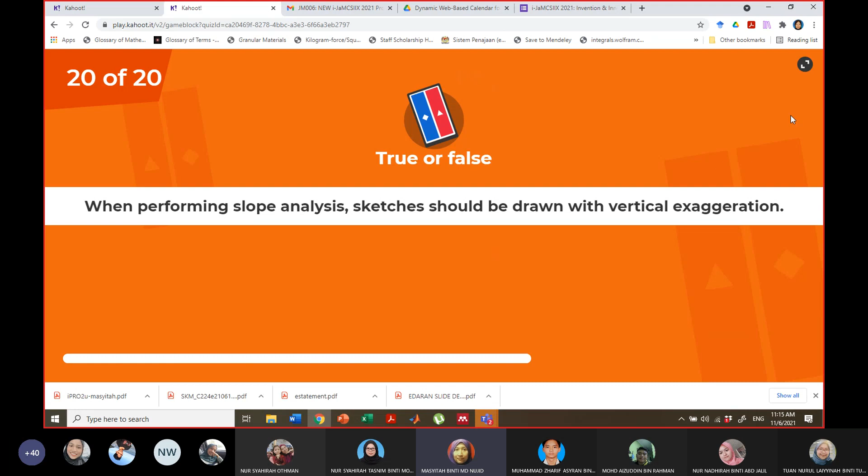Okay, the last question. Is it true? Vertical exaggeration. Okay, the answer is false because, as I said just now, you can use the appropriate scale to analyze it. Okay, we break a few minutes.